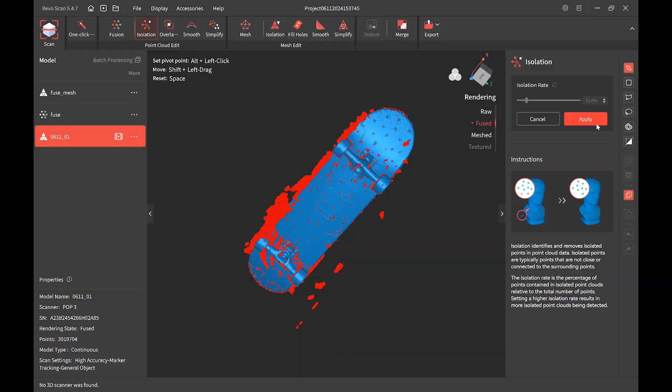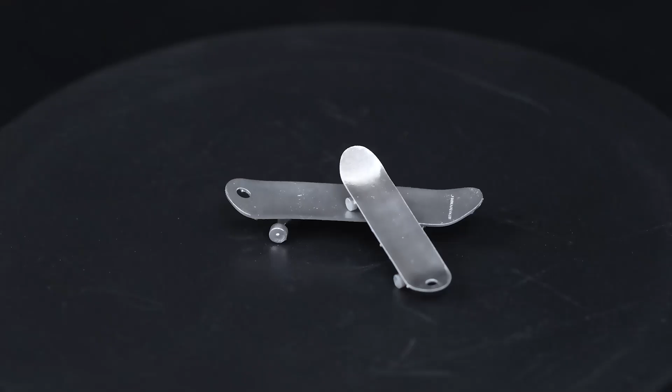So today I'm going to discuss with you how to scan, and especially completely scan, a complicated object like this muffler or this skateboard. Why is this complicated? First of all, you can see there are some rich detail surfaces like here and there, also like the wheel and track, but it also has a lot of featureless surface, like a very flat surface here and here. So that's what we're going to do today.

And you have already seen Travis scan this muffler. So today let's deal with this skateboard. Okay, first things first, what scanner should we pick for this project? Well, it might look like this skateboard is an optimal size for the Range 2 and also MIRACO's far mode, right? Because Range 2 has a big field of view.

But we are not going to use Range 2 for this skateboard scan. That is because Range 2 has a wide field of view. So it can capture the surface, the frame of it, no problem. But look, this skateboard has some awkward angles like here, here, and here. Range 2 has a big field of view, so it might be difficult to get close to it to get all of these awkward angles. Let's see, and you will know why in a minute. Okay, let's go.

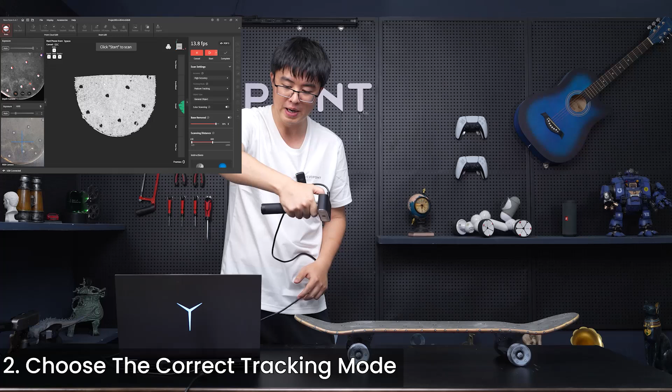Okay, number 2, what tracking mode should we choose for this skateboard? Well, maybe feature tracking because it has some feature-rich areas like the wheels and track here, but maybe not for Pop 3. That is because Pop 3's field of view is smaller than the Range 2 and MIRACO. MIRACO and Range 2 might just scan this in one go, but for Pop 3, look, now we're on feature tracking, and this might happen. Yeah, it just goes out of control because this is a really flat, featureless area on the top.

And also remember I said complicated object. This narrow side is also going to be a problem if we use feature tracking. When we're switching from the top to the side, there's really not much for us to keep tracking. So that's number 2. That's why we're going to use marker mode for today's project.

Okay, step 3. Well, I have already sprayed this, so you cannot see the original texture of the wheel and the track. The wheel is very transparent, like some rubber or acrylic texture, so I need to spray it. And also the track area is a very shiny metal part. So in order to scan something, remember, too dark, too reflective or transparent areas, you need to spray it first.

And here are the Revopoint scan sprays. AB6 is white and it evaporates by itself within 2 to 6 hours. And ABP is permanent. Well, maybe not 100% permanent because you can still wash or wipe it away. So you can choose either for your project when you're scanning. But in today's case, because I need to introduce and talk about it a lot, I don't want it to sublimate before I can start scanning. So in this case, I'm going to choose Revopoint ABP for my scan spray.

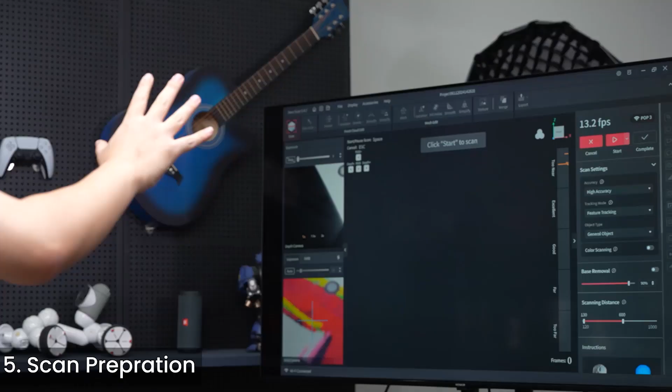So in this way, I will have a much better way to monitor what I'm doing with a big TV and a wireless scanner. So this, well, I call it my favorite. I don't know what you think. Okay, so let's scan it in this way.

Okay, all set. So before we go scanning, you can use this base removal function to remove the table or any surface you're scanning on. Or you can do like me and put a big black plastic sheet. Both ways work, depends on what you want.

And let's check the settings. High accuracy, good. Not feature, marker tracking, general object. And exposure, you can use auto to let the software set it for you, or you can use manual exposure setting. And you can do it right on the scanner instead of in the software, so that's pretty handy.

And you can even change the exposure in mid-scan, so that's pretty cool. So make sure when you're doing that, use the scanner's button to change the exposure level instead of doing it on the software, which is not that convenient.

Okay, so let me explain how I'm gonna scan this skateboard. All the marker dots are already on it. So first I can scan the top area, and I will tilt my scanner, move to scan the side and the two wheels. And after this side is done, I can turn to this side.

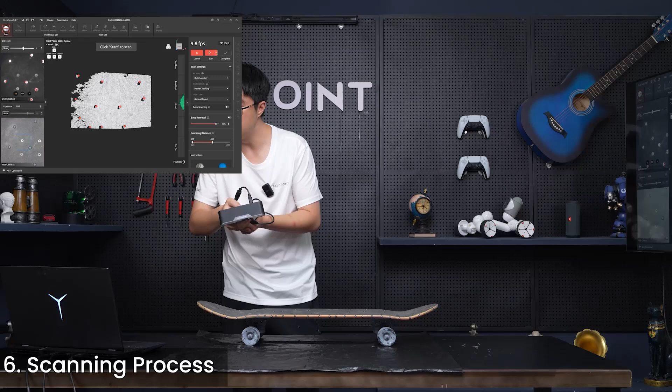When it's all completed, I can turn it up 90 degrees and start scanning from the side to the bottom, and on the other side, and eventually I can turn it over and fill up whatever areas I'm missing. So that's the plan. Let's go. Okay, so first the top area, exposure 6, looking good. Let's go.

Okay, so sometimes when you're moving too fast, the scanner will tell you it's losing track, and do not panic, like right now. Do not panic, just move back to what you have previously scanned, and the scanner will find its way back on tracking. Anyway, let's finish the top area. Okay, done.

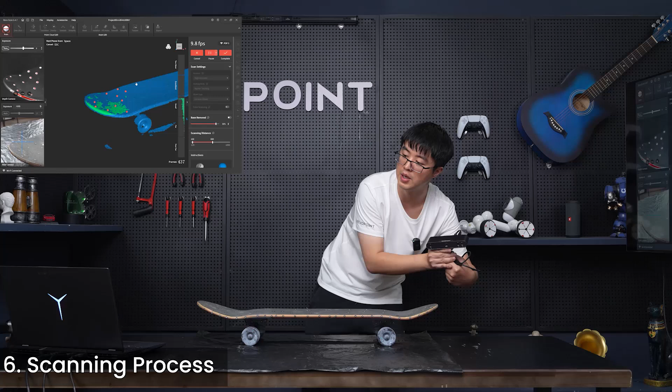Tilt slowly when you're switching from the top to the side. Remember to do it slowly and steady, okay? And also scan the very side a little bit. And you want to do it very slowly, especially on these areas without too many marker dots. Don't rush it.

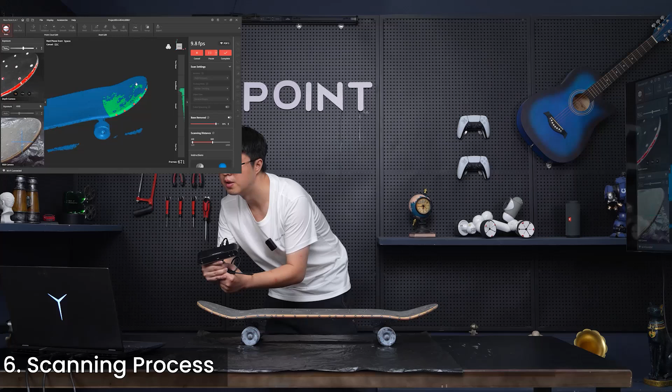Okay, the wheel, and okay, almost there. And try to scan the side more. Okay, and also this wheel here. Top area. And look, if you don't have enough marker dots to keep track on, you can do like this, like me. You can move a little bit far away. Even though the distance meter is telling you you are a bit far away, that's okay.

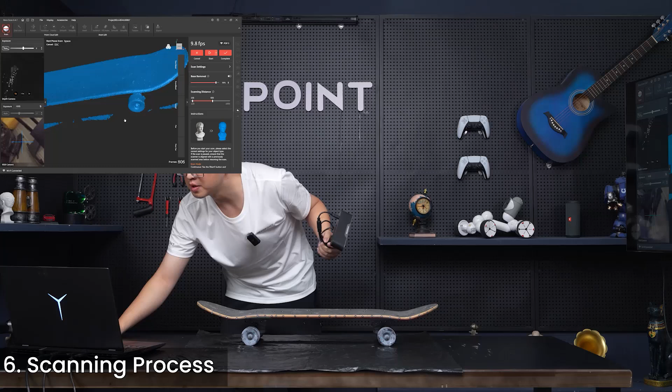Okay, this side almost finished. Now let's pause it and let's check. Pretty good. So now let's turn to the other side. And remember, when you're resuming your scanning, do not scan from the areas that you have not scanned anything yet. In that way, the scanner won't be able to find its way back on tracking.

So what you can do is simply like this. Pick an area you have already scanned, and look, like now, the scanner finds its way back on tracking right away. Okay. Wheel and a little bit on the side. Okay. And this part of the wheel. Okay. Oops. Okay.

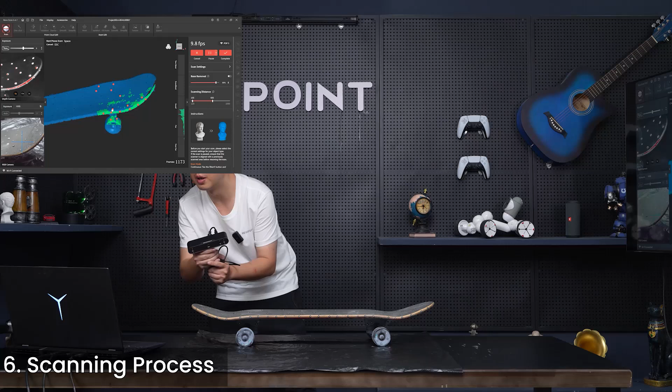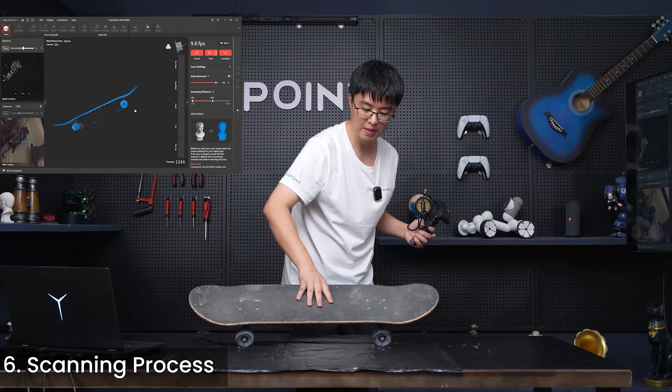And that's the last wheel. And also a little bit on the side. Let's just fill it in there. Okay, pause it. Okay, now we have a very good frame of the top and the side area. So now we can turn this 90 degrees.

And now here is where we're gonna resume the scanning. It's better to be this area, the side of the wheel and also the side of the board. Well, maybe not right in the middle of the board, because not so many marker dots here. Maybe the scanner won't be that easy to find its way back. So here, yep, okay. Right on the target.

So we can scan more of these areas. Keep going. Keep going. Okay, now this wheel right here.

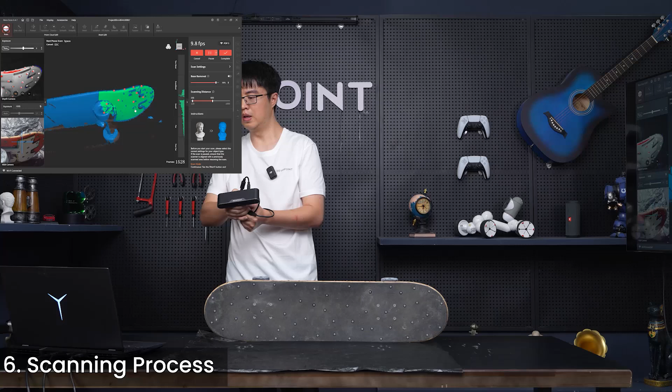Okay, so now we can tilt more to try to scan the middle area. And do not worry about the other side of the wheel. We'll turn it over once again so that we can capture all of the areas that we need. Okay, now is the tricky part. We might want to get really close, like the inside of it, to scan the truck.

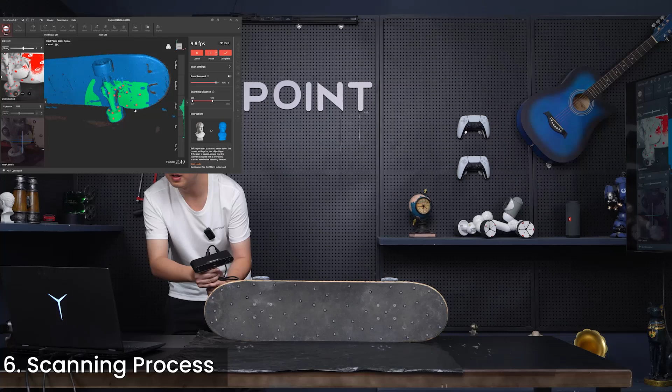Okay, and this wheel. Almost there. Okay, maybe tilt it a little bit here, so I see a little blanks. And the wheel here. Okay, let's pause it. So as you can see, now almost complete. But I see little holes in the middle, but no worry, we can fix that later.

Now let's turn it 180 degrees on this side and let's resume scanning still this area. Oh no, actually, that's not towards you, it's towards myself. Okay. Okay, find it right away. Okay. No problem.

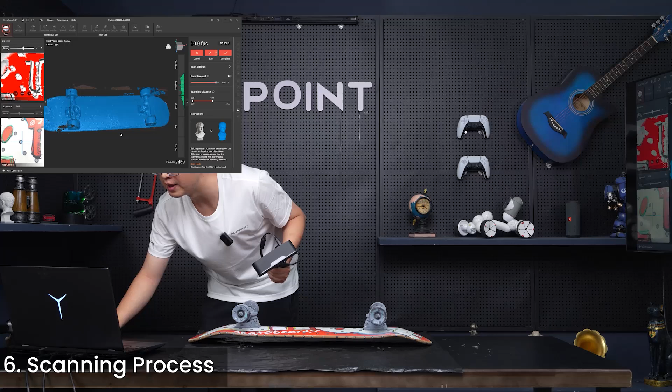And also the wheel here. Okay, almost complete. Now put it on the bottom. And let's check our point cloud. And as you can see, it's almost done. Just a little bit of hole here and there. So let's resume our scanning from here and try to fill the holes on the area we have missed.

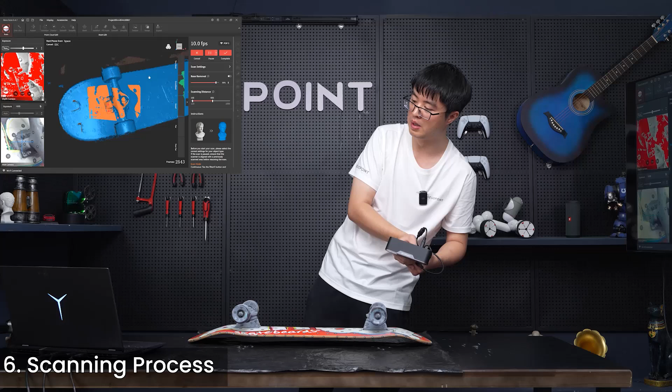And the small holes, we can just use the fill hole function to fix that in the processing stage. Okay. So in order to scan these areas, we might want to get really close to it. But not too close. When the scanner says we're already too close, it's better not to keep moving on. Okay, so that's done.

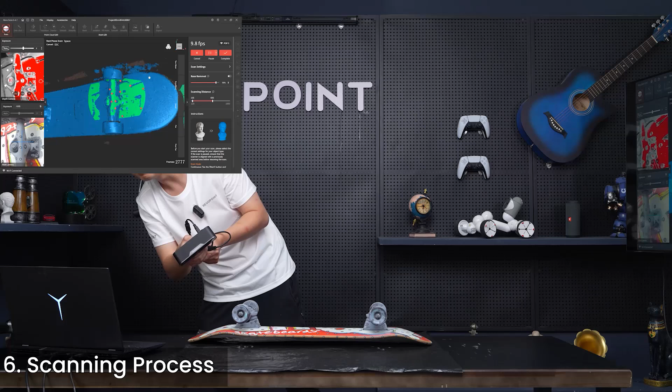And I also see a hole here. So let's try to fill that. Okay, and the wheel here might not be completed. Okay. So yeah, that's it. With almost no holes in the middle. Can you see any? Barely nothing.

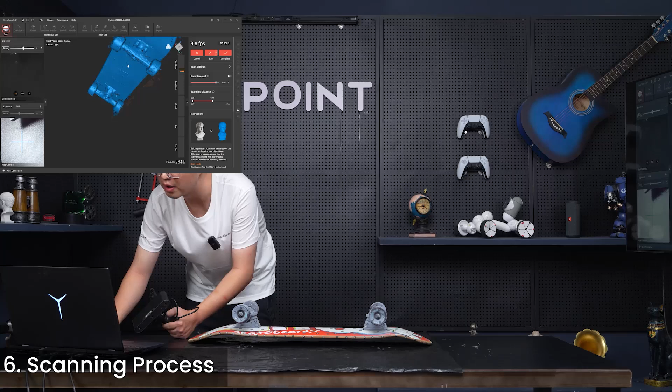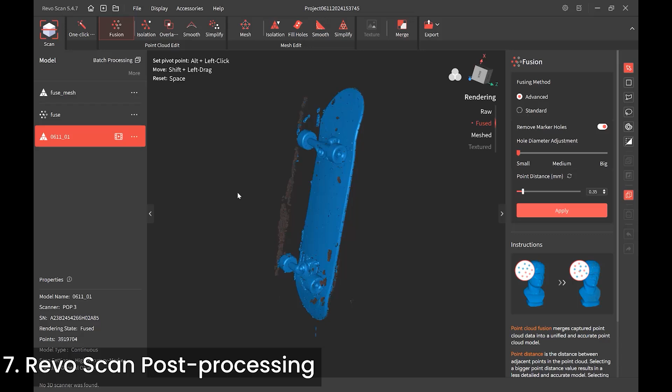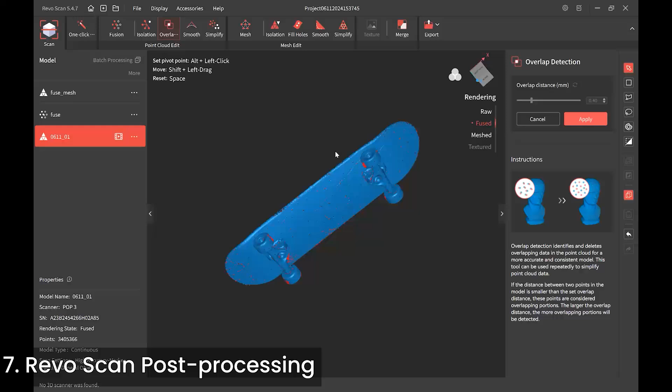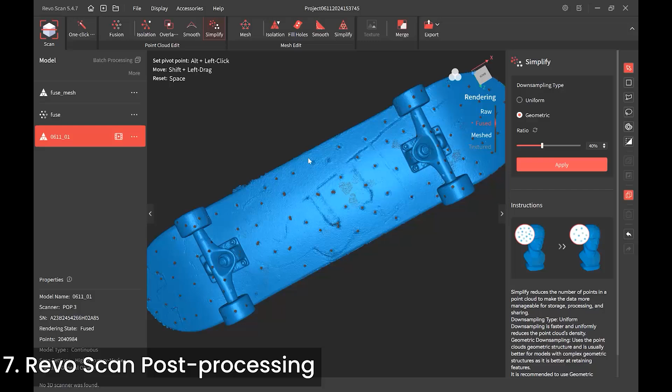Okay, now the scan has completed. We have a very complete, very good point cloud. I can see a little bit of holes here and there, but that's no matter. We can fix that very easily within Revo Scan. Okay, good enough. With some of the noise, and yep, everywhere is very complete. No problem.

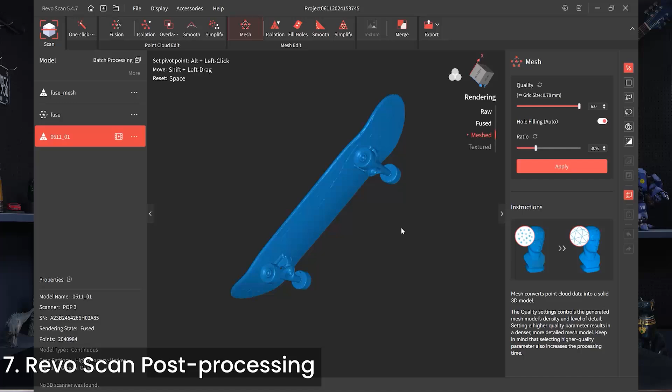That's a good scan. And so now our next step is I will use QUICKSURFACE and Blender to fix and reverse engineer my 3D model. But let's say, what if you don't have a perfect scan? Well, of course, in this video, I scanned this skateboard more than one time. So let me show you something I scanned.

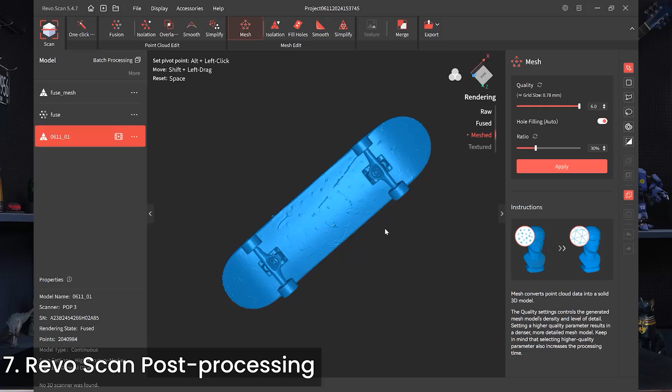So let's just use this very bad scan result to show you how I'm gonna reverse engineer and fix this model with QUICKSURFACE and Blender. And eventually we can then import the fixed 3D model to the slicer software to print it out.

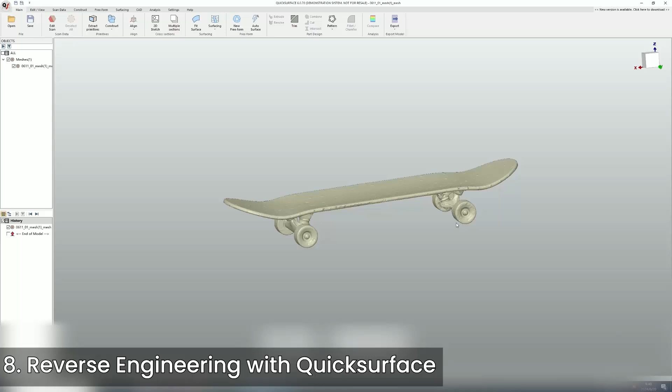Okay, so now let's open up this really stupid 3D model. Well, not stupid, it's actually not right. One of the wheel and track is fine, the other side is really messed up. And also the surface, the board area is not even aligned with each other. I think I made some mistake, or I was just scanning too fast. Okay, but no matter, we can still fix it with QUICKSURFACE and Blender.

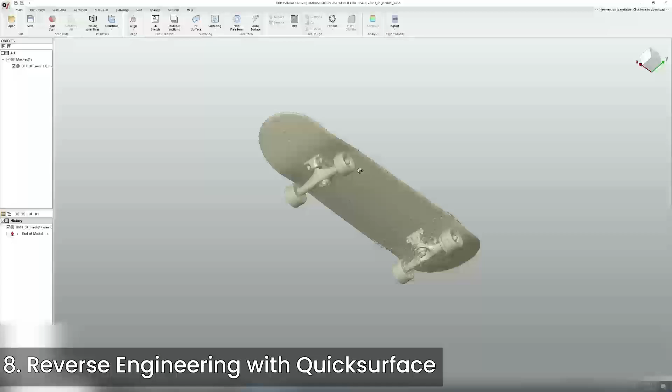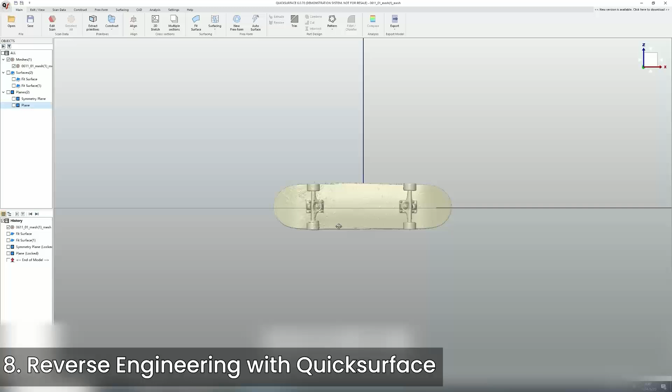So first, let's open up QUICKSURFACE. Step one, we need to recenter the 3D model with all the coordinates set as 0, 0, 0, so it will be nicely centered in the very middle of this coordinate system. Okay, position correct. So now step two is we can use the 2D sketch function to find the outer frame of this skateboard.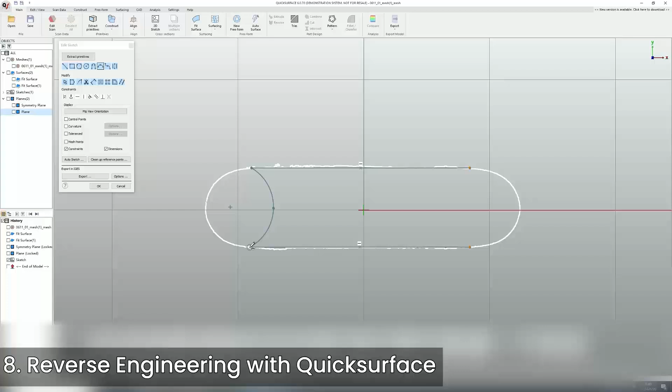Okay, then we have it. We can use this to start to rebuild a new figure. We can manually use this editing function to draw two straight lines and draw two half circles on the side. Okay, now we have it. And then we stretch this figure up and we can have the thickness of this skateboard.

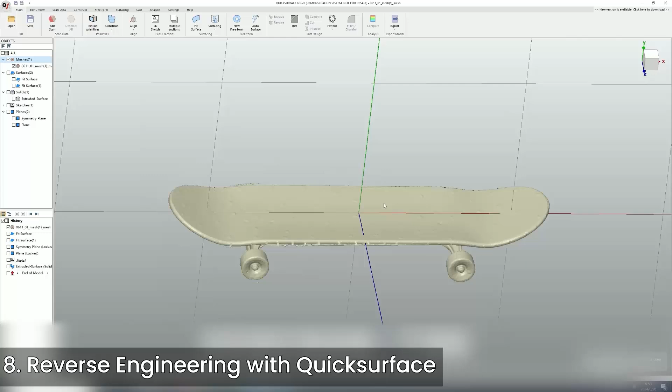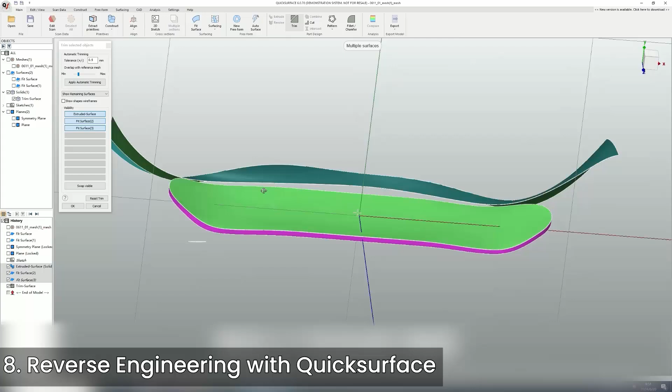Okay, all done. So now we need to use this fit surface function to use the rough scan data to get the original surface that is the same as our real skateboard. First the top and the bottom. Okay, and we need to cut off the redundant areas. So then we have a brand new skateboard, only the board area. We don't need to worry about the wheels and trucks. We're gonna do that in Blender.

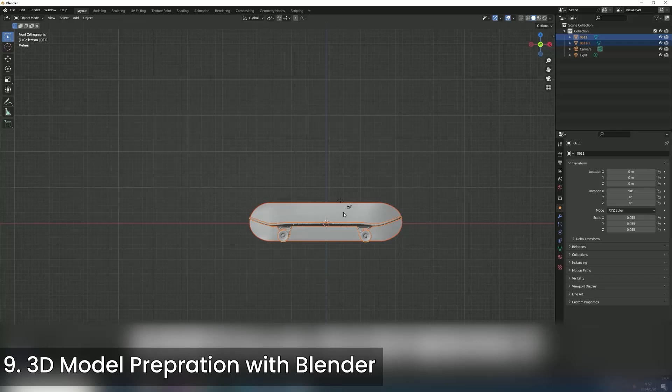Okay, so now let's open up Blender and import the rebuilt skateboard, only the board area, and the original rough scan data together. Because we only need the wheel and truck area, we now just need to separate the wheels and trucks in Blender. Just cut it off nice and easy.

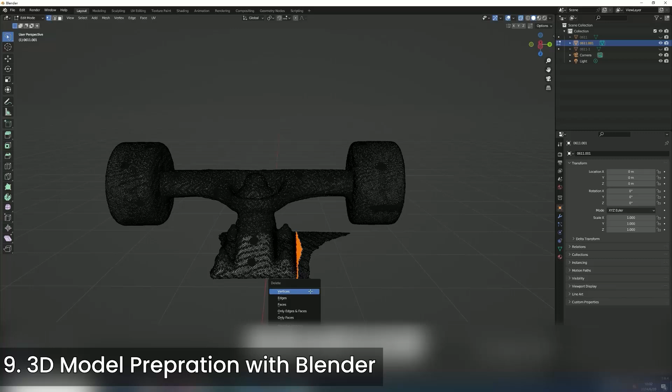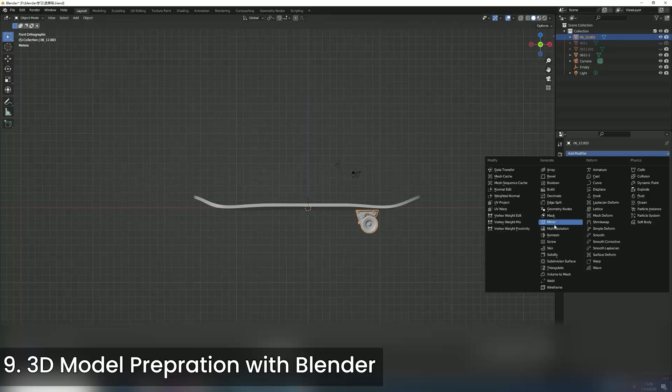Okay, so now the wheel, we can put it to the rebuilt skateboard. And well, how about the other wheel and truck? Because the other areas are really messed up in scanning, but we don't really need to rebuild that. Because the other side of the skateboard is the same, we just need to mirror this wheel and truck area, and we put it on the same position on the other side.

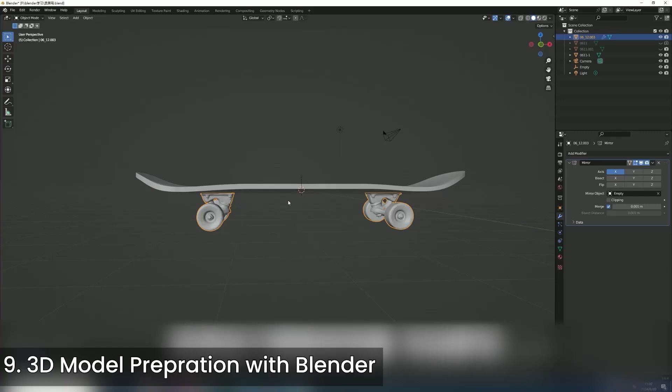Okay, last step, we can just compare the original scan data with this edited skateboard 3D model, no problem. So now we can just export it, and now we can slice it with Chitubox and be ready for 3D printing. Okay, now let's start slicing it.

So first, the software I'm using is Chitubox Pro. Chitubox is a 3D slicing software company that works with Revopoint. They are also our partner. And they have two versions. One is called Chitubox Basic, now the latest version is 2.1, and also Chitubox Pro. Chitubox Basic is a free software. You can just download and use it. It provides all the basic solutions for 3D printing. But of course, Chitubox Pro has more advanced and more complicated operations and functions you can use.

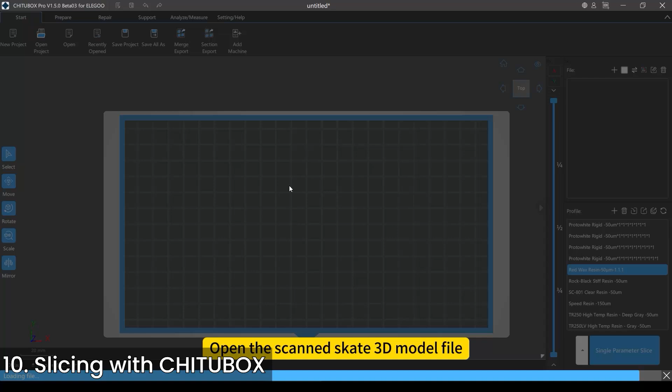So let's open the scanned skateboard 3D STL model. Right here, let's put it on the plate and let's scale it. Okay, after scaling it, now let's rotate this model so we can have a better operation angle of it. So first I want to make this skateboard smaller so I can dig a hole in there and put it on my necklace or hang it on my keys or whatever you like. So you don't have to really drill a hole in the skateboard after it's printed.

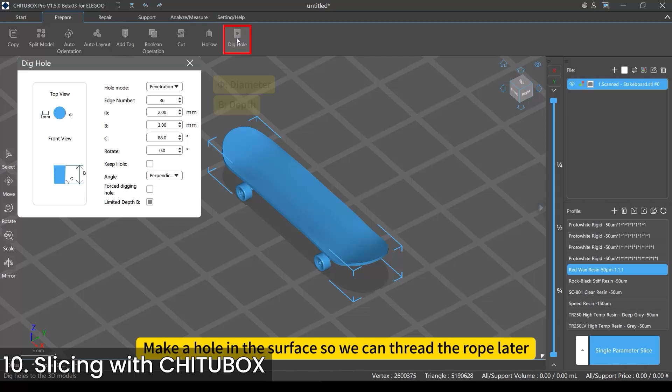You can actually use the dig hole function in CHITUBOX Pro. Just like that, click the dig hole function, and we choose, let's say 2 millimeters for the diameter. And depth, I'd say 3 millimeters is enough because now we have a much smaller skateboard. It should be thinner. Okay, and the front view will look like that. Sounds good. Okay, so the hole is there. And now let's start to add the support.

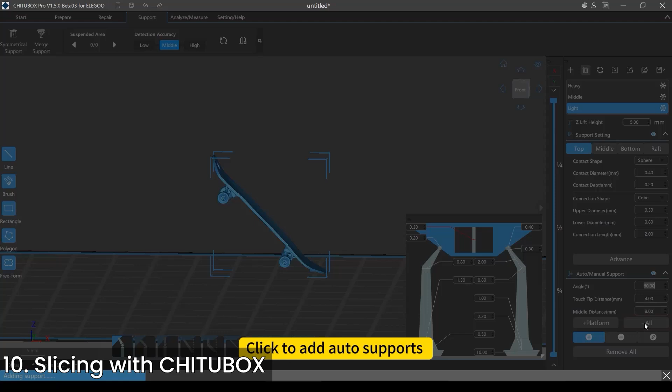First, let's adjust the angle for the support addition. If you click this tilted angle, there is a smaller cross-sectional area, improving the printing success rate. At this tilted angle, the model is shorter in height, so it also reduces the printing time. Okay, so let's add the support. The angle, we can also adjust manually. So first, let's let it automatically generate support for us. Well, it looks almost there, but I think we can have some, let me see.

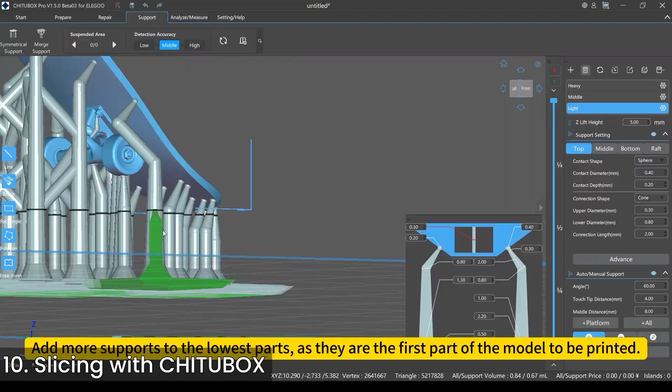Yep, maybe on the wheel track, let's manually put 2 more supports because those are the overhanging support points the software detected. Also on the lowest part, because this part is the first part to be printed, which means this part will support all, or at least most, of the weight of the later part of the skateboard. So it's always smart to put more supports on these areas, the starting point. So let's manually add some more supports here. 1, 2, 3. Okay, that's about it.

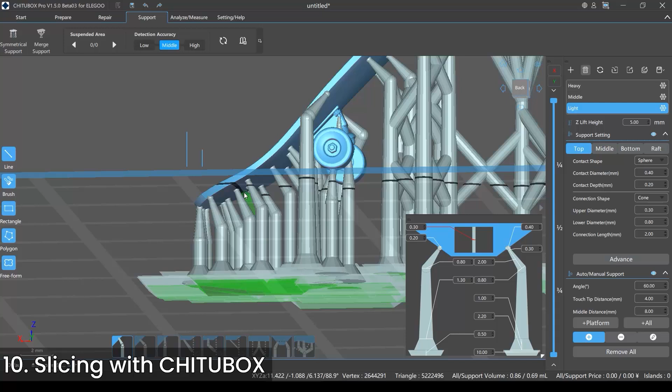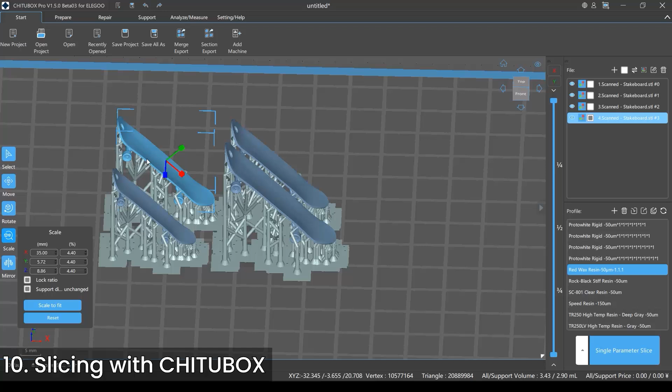And of course, we could just print one on the plate, but we can do more at a time. So we will have multiple skateboards to use and maybe print and paint them in different colors. So we can just copy and paste, Control C and Control V, so we have more. And also we can make them in different sizes. Let's just slightly change their sizes so that we have more options when it's printed out. Okay, so that's about it.

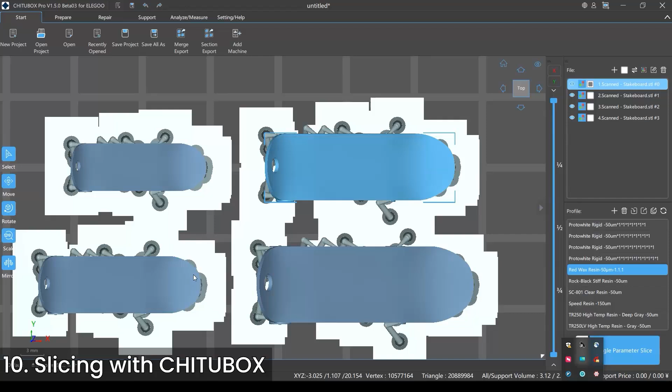Well, if you want to better distinguish these skateboards or any 3D model on your plate in CHITUBOX, you can click this Prepare Add Tag function. And you can then add special text to them, like names.

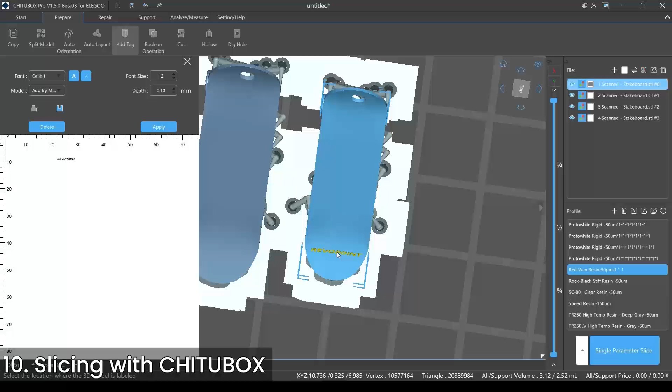Like here, you can add just Revopoint to it. And of course, it will be printed out for sure. So let's just add 2 Revopoint here. And just click Start Slicing. I have completed all the parameters, so let's just use this default.

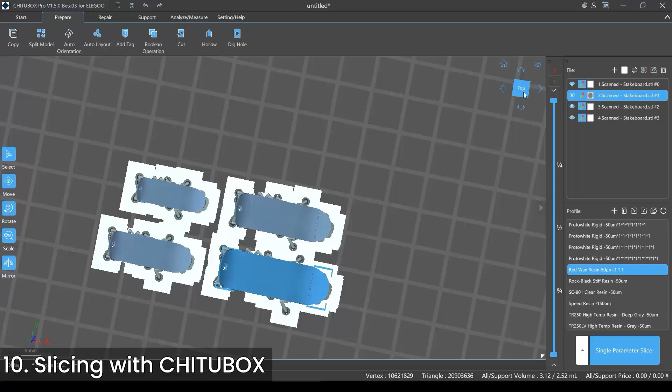And the 3D printer I'm using is Phrozen Mighty 8K. As you can see, all of the parameters I have done for that. Okay, and let's save it. Okay, completed. So now I saved it to a USB disk. So now we can just put it in the 3D printer and print the skateboard out. Okay, now we're ready to print it out.

So the printer I'm using is Phrozen Mighty 8K. And also I have the resins. The brand is Sunlu resin. I have 14K and the Standard Plus. They're both gray, but they also sell the red wax resin, which is pretty good. So let's add some resin in it.

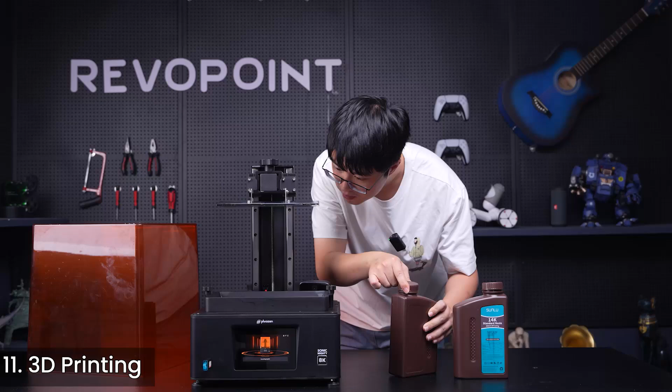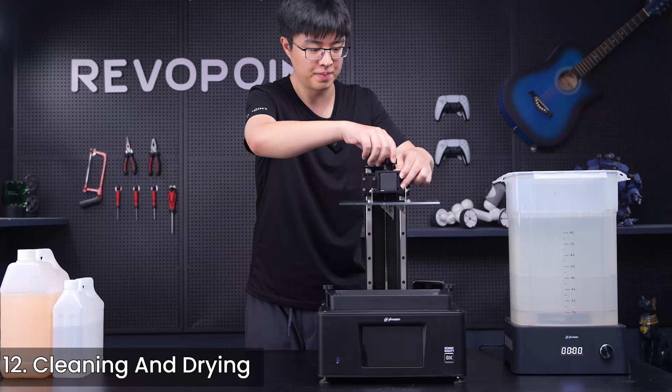Okay, seems now the printing is completed. Let's check it out. Looking good for skateboard. Okay, so now we need to clean the printed skateboard. Now there are two ways. My more preferred way is I don't take it off with the shovel, because sometimes it's pretty hard to shave it off just like that.

So a more proper way, I suppose, is I always do like this. Look, I can just put it in with the plate, so I can just wash it all, and it will soften the bottom layer on the plate, so it's much easier to shove it off like that. And notice one thing: normally, because this is not water washable, the best detergent is 99% alcohol. But first, I don't do 3D printing a lot.

I don't do the 3D printing in my lab all the time. So it's kind of a waste, because alcohol will evaporate eventually. So I don't use 99% alcohol in my washing machine. Instead, I use this hand detergent. And I know this is not the best way, and maybe it's not gonna wash it properly, but I'm gonna use this in the machine, let it wash the resin for more than 30 minutes, and then I can use a little bit of alcohol. And I don't even have the 99%. The one I got is 95%, but that'll do, okay?